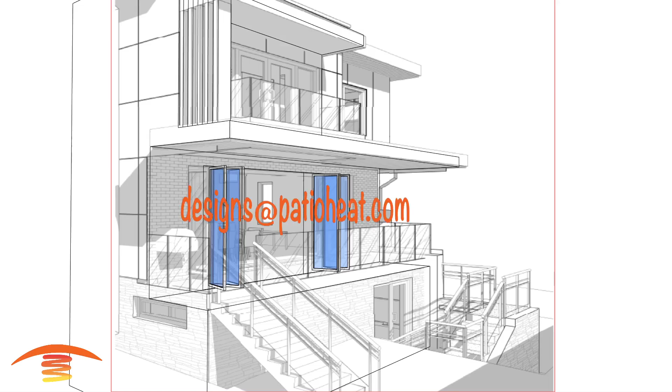Now let's get heating. This is going to be a tutorial about what kind of information we need in order to make any type of recommendations.

I received a line drawing of this particular application, and I was given some information in reference to the door width here as well as its height, and the height of the bottom patio deck, as well as an image of what the structure would look like before it actually had the ceiling finished.

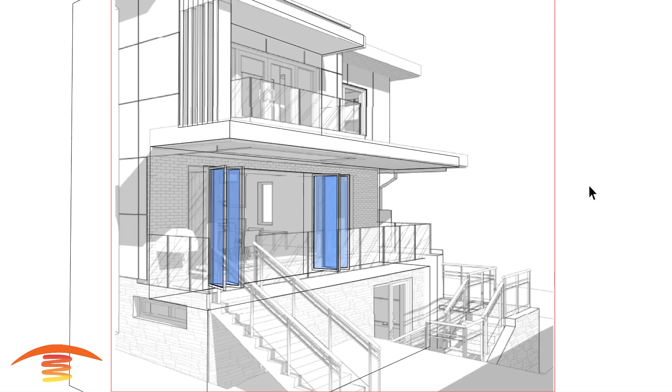Let's go ahead and look at some more information that is really required in order to make the best decision. I drew up what it looked like according to that drawing, and the information necessary is knowing—let me first show the dimensions that I put here.

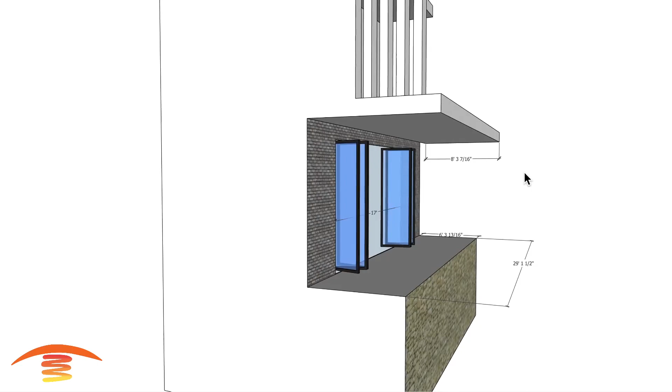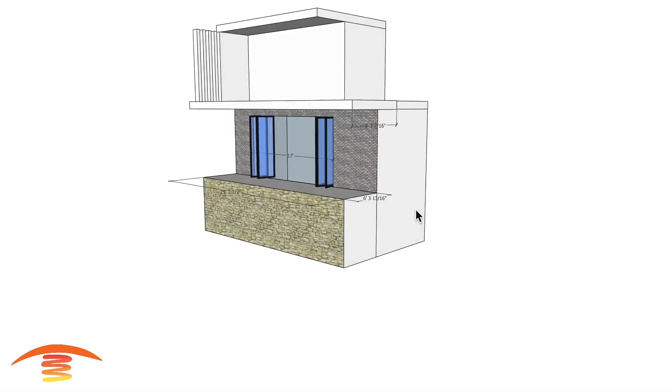Now these dimensions are most likely untrue. You can see here we have a 6 foot 3, and this is called 6 foot 4 inch and 8 foot 3 inch here, covered section here, and then 29, 17 foot here. So we really don't know what the true coverage or space is.

The question that was presented is: would you place the heaters on the edge pointed in towards the center, or would you put them above and point them straight down? What would be my preferred application in this scenario?

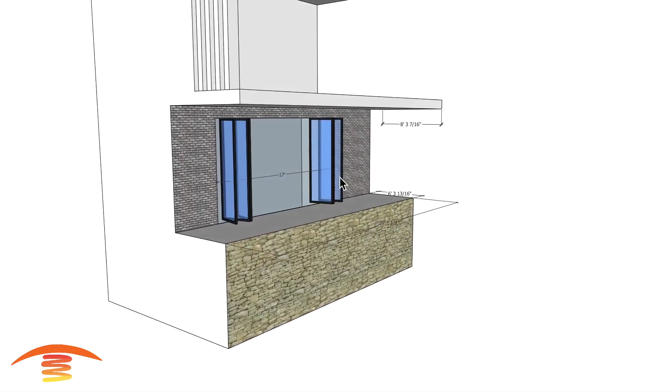I believe it's only this one section of the patio. I don't believe it's this section up here, although that information was not given either. So in order for us to make the recommendations, we do need very specific pieces of information.

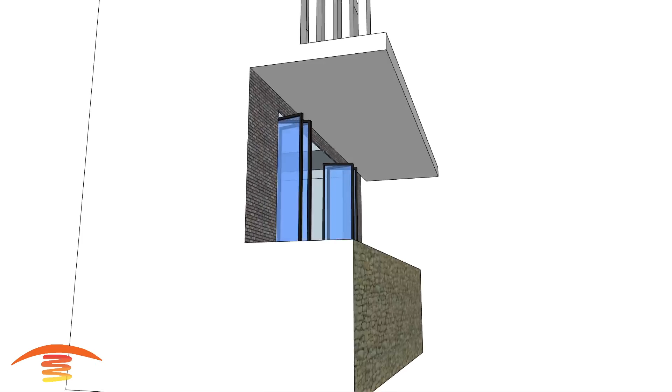The other thing is, I'll go ahead and show you the photo we received of what it looked like from this perspective. Let's see if I can show you that.

From this perspective, you can see there's ceiling joists, and you can see some rafters or ceiling joists here go in the parallel direction as the residence itself, and then the other ones are perpendicular.

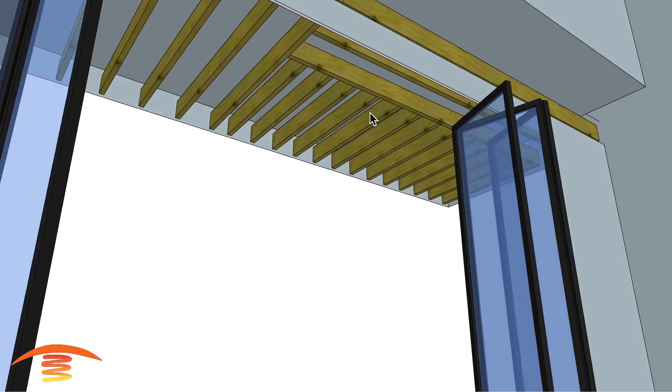Going back to the viewer's question: at first, can I put the heaters on the outside like I just mentioned and pointed in, or above, which is best? And they came back and said, oh wait, we can actually place the units as flush mounts.

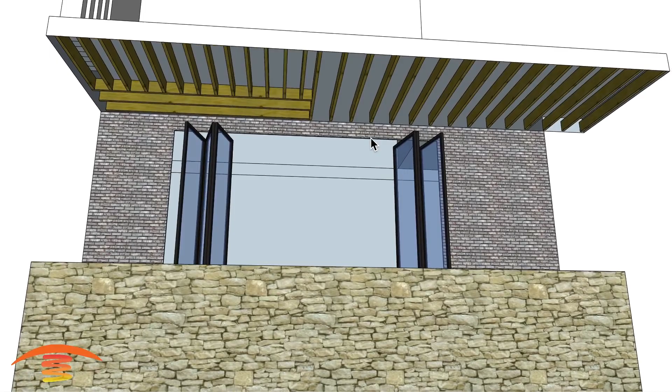With flush mount finishes, we need to know very much about the details of the ceiling in order to make a suggestion, things like the ceiling joist dimensions. If this is an 8-inch dimension, that would be the minimum you can go.

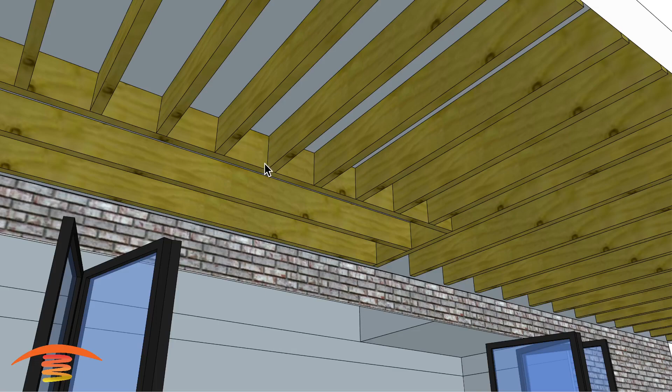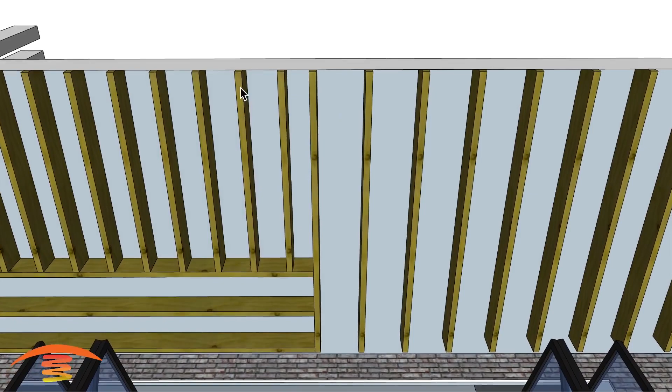Also the gap between the ceiling joists—I believe I have these right now at 8x2 ceiling joists, and these are also 8x2 ceiling joists, but you can see I have these much closer. I have them at 12-inch center to center, and these ones here at 16-inch center to center. That could be something true on this application, but I have no information about that, so I can't say where we can actually place those units.

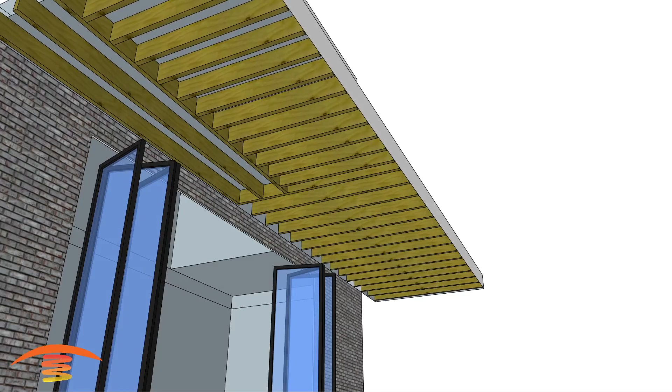Here we'll go ahead and just throw the flush mounts in, and let's see if I got it—yes, so here's the flush mounts that I would recommend, and this is just a preliminary recommendation. But you can see here that with the 12-inch gap, we really don't meet the opening dimensions that we need, so that's a problem.

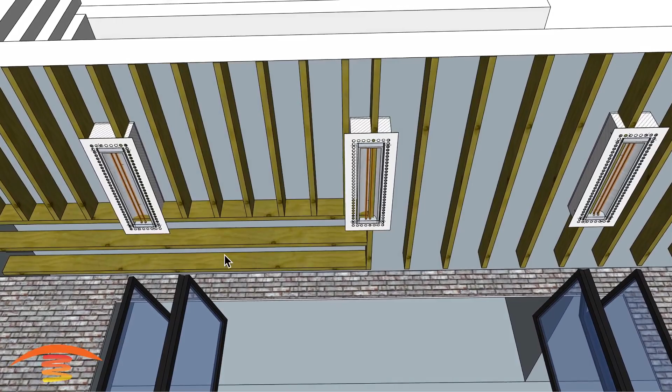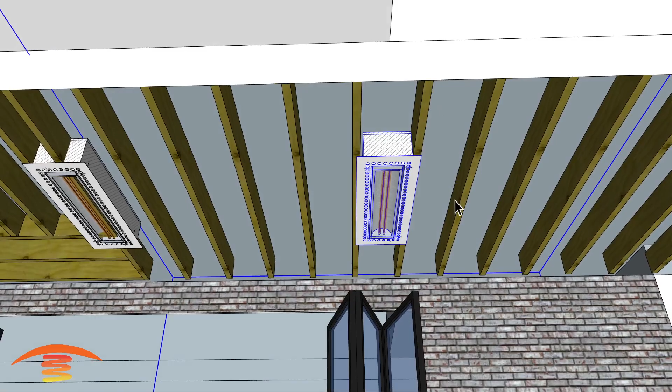If this parallel ceiling rafter or joist stops at the center point of the patio, obviously this isn't going to be possible in the center of the patio. This one we could move left to right. Let me move it slightly to the left, and with the 16-inch center-to-center gap, we could manipulate that so it fits into that section.

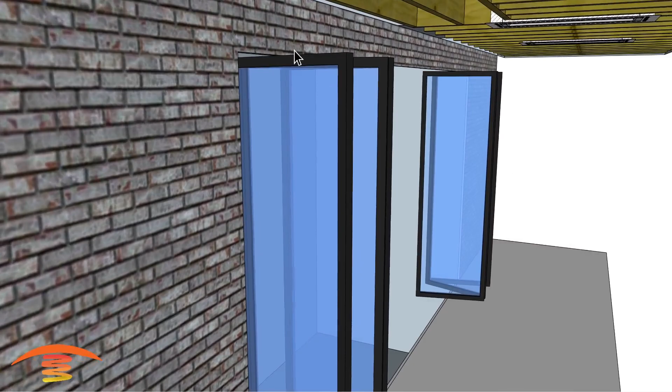Another thing is, I'm assuming from the line drawing that these are going to be doors that swing out like this. I have them centered right now, so they'd be hinged up here, but if they're hinged back here, they're going to come further out into the patio area.

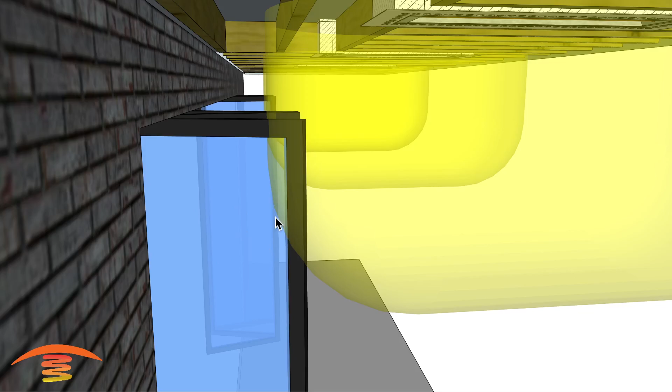The things we need to look at are clearances—clearances below the heater. You can see that if this is an all-steel door with glass, it's considered non-combustible. However, what do we do about the ray coming down? Where is it going to penetrate into that glass door? Are these glass doors actually out further?

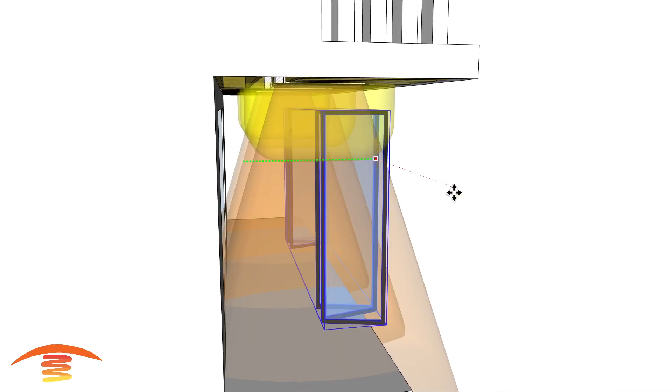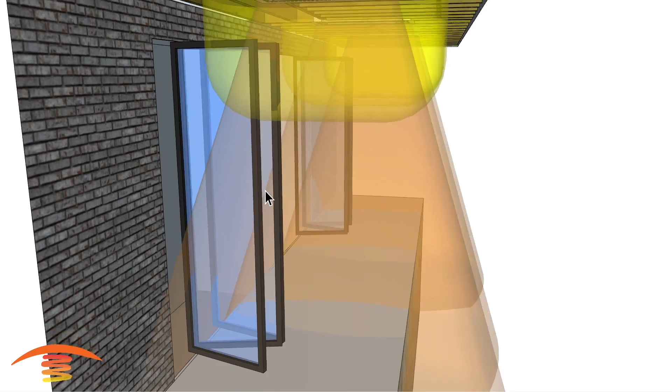Let's say about 12 inches. So now are we penetrating that glass so it gets superheated on a cold day—superheated right down this line, basically. So this will be cold glass, this will be superheated glass. That would probably cause the glass to shatter at some point, whether right off the bat or a couple years down the road. I don't know the answer, but it's very possible that it does shatter.

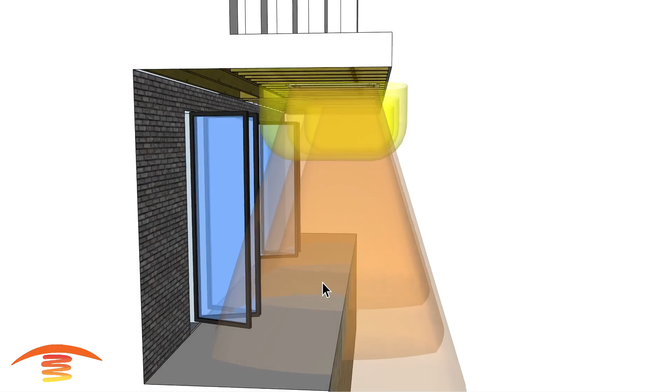So that's another concern—we'd have to move all these heaters out further, and doing that, would we actually heat up the deck itself? Are we throwing all the heat down on the open side here? That's something else we have to take into consideration.

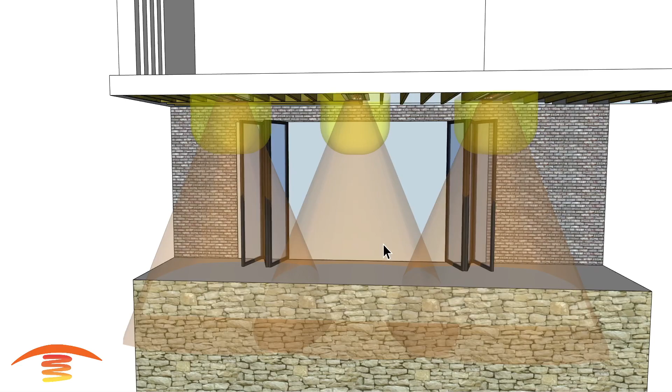Another thing is, do we have any fans? Do we have any recessed lighting up here? Is there any other type of fixture that would cause us to move or manipulate the positioning of the heaters better? Also, the true height here, I believe I had at 9 feet, something like that.

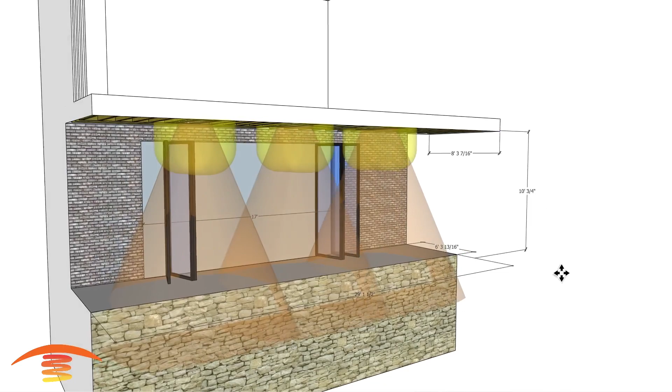Let me throw that on here real quick. So I have it at roughly 10 feet off the finished floor. Now these are 5,000 watt units—6,000 watt units are much longer, so that would be an issue. But at 10 feet off the finished floor, 5,000 watt units would be pretty reasonable for this particular portion.

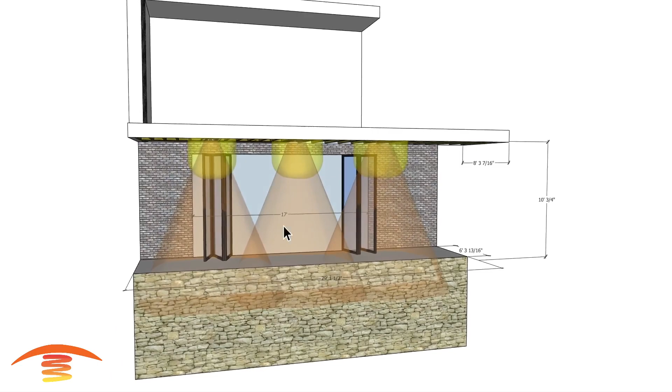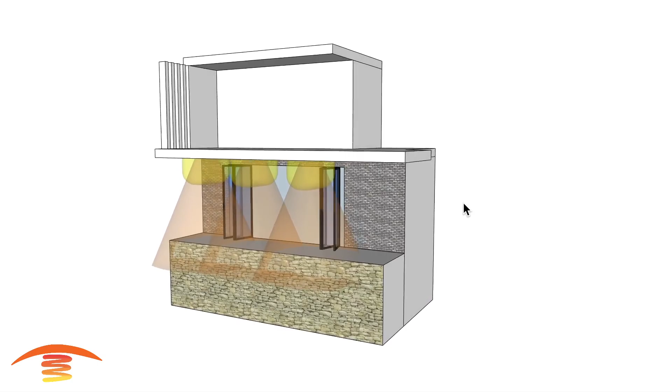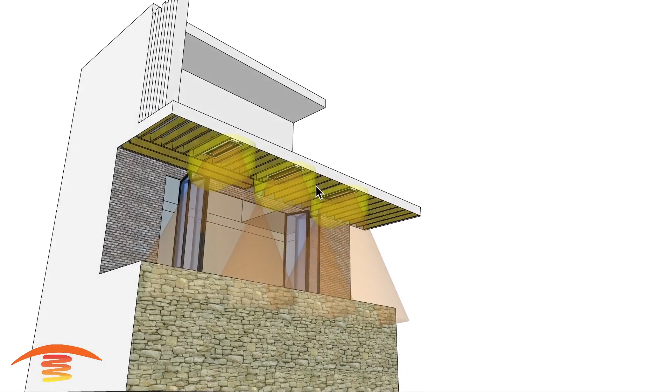Again, I don't know if that's true up here as well. So all the information we request is based on giving the best recommendations we can to any viewers or customers. It's what we do best, but that detailed information is very much required. So that's what I'm showing today—the information we're looking for to help you decide what heaters to place in your particular application.